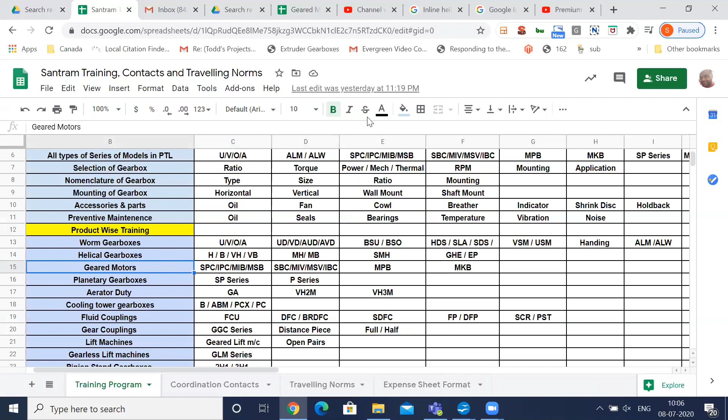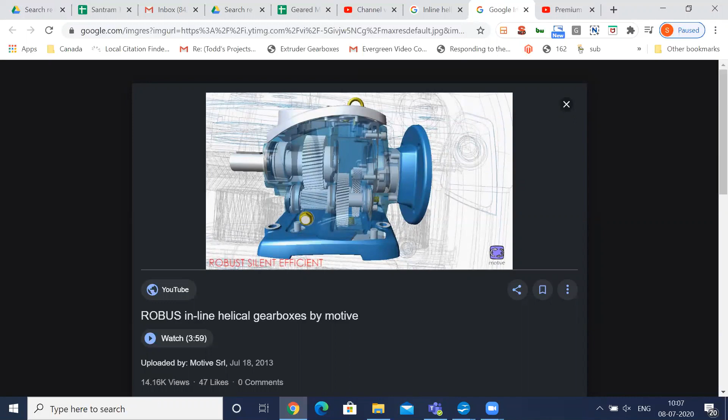Okay, so helical. This is an image view of a competitor's gearbox, but the technology is the same. I've just used the image. Here there is the pinion and this is the wheel. These pinion and wheel have teeth on them, cut at a helix angle, and they are the ones which transmit torque.

Like in a worm gearbox the main thing was the worm shaft and worm wheel, here in helical the main thing is the pinion and the wheel. Pinion and wheel combine, they match, and they make a single stage. In this case you can see 1, 2 and 3. There are three pinions, so three matching wheels: one pinion, one wheel, second pinion, second wheel, third pinion, third wheel.

And these are all bolts. This is the main output shaft. This output shaft will have this wheel on it. This is the end cover; it will have a small pinion on it at the input side. And this big cover will have the output shaft on it. There are three internal stages for a three-stage gearbox and two stages for a two-stage gearbox.

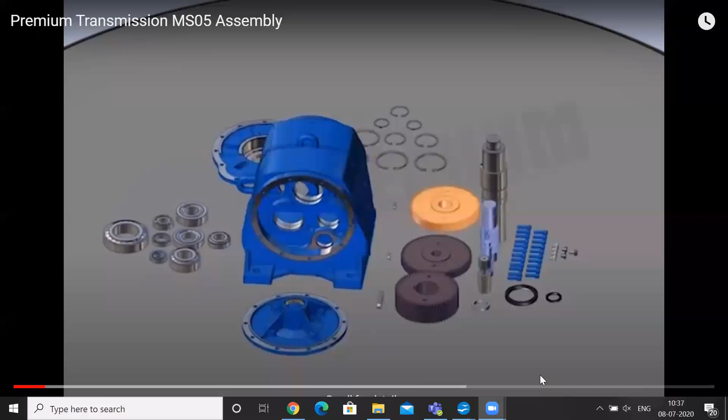So in geared motors, what are the main terminologies? Let's write it down. One is the stages. One stage is created by pinion and wheel, and that ratio will be up to approximately 5:1. So from 2:1 to 5:1 ratio is possible in one stage. The same concept applies if there are two stages, means 5 into 5, so around 25 ratio is possible for a two-stage gearbox.

So if it's a 10:1 ratio, it's a two-stage gearbox, but a combination like 2 into 5, or 3 into 3. And for three stages, the maximum possible ratio is 5 x 5 x 5, so around 125:1. If it is four stage, it can go even higher, a very high ratio. And here the 5:1 is approximate.

So if we consider 6, it might reach even higher, like 36 ratio, or in this case like 180. These are all combinations possible. Even 4-stage or 5-stage can be customized if they want, but the standard is 2-stage and 3-stage only. So that is the pinion and wheel arrangement.

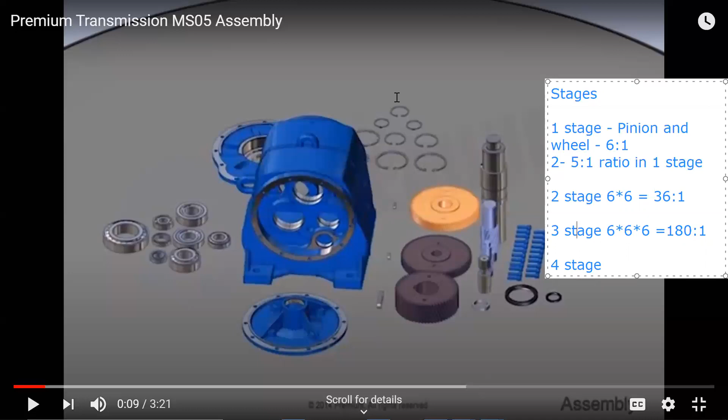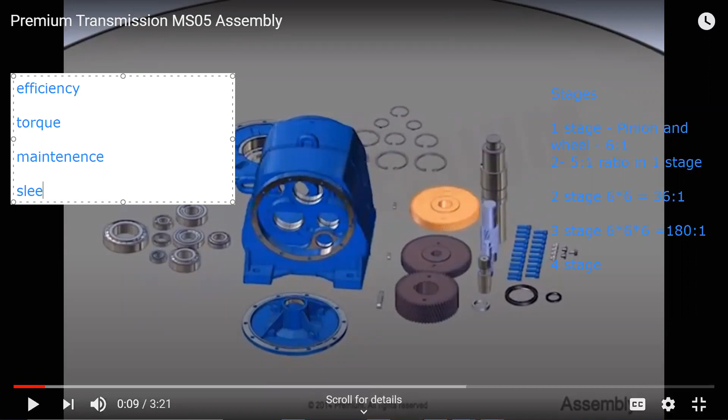Now, what are the benefits compared to a worm gearbox? Benefits are efficiency, torque, maintenance, sleek design, noise and life. Efficiency is almost 98% plus, while in worm it was 100 minus ratio divided by 2, so for 50 ratio it will be around 75%, while here it will be around 98%. So the efficiency is very high.

Torque transmission is definitely more, because it's a high efficiency product, so torque is transmitted fully. Maintenance is almost zero; once a year you just need to change the oil, the same 320 grade gear oil. Design is very sleek, meaning the weight to torque transmission is high.

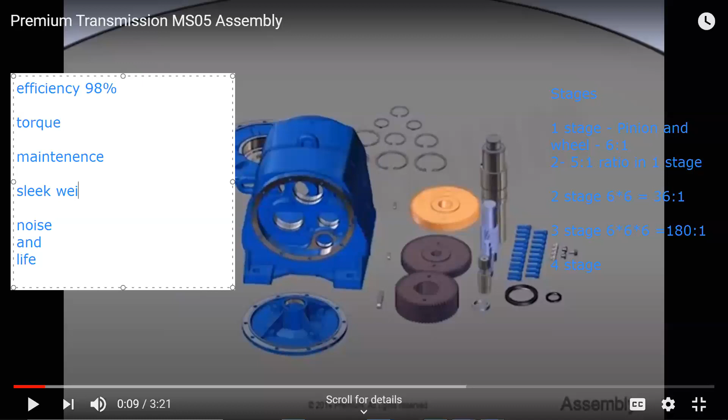It will be much higher than a 100 kilo worm gearbox. That is the weight to torque ratio. Then noise is much less, below 85 decibel. And life is very long. Apart from this, you can also discuss the ease.

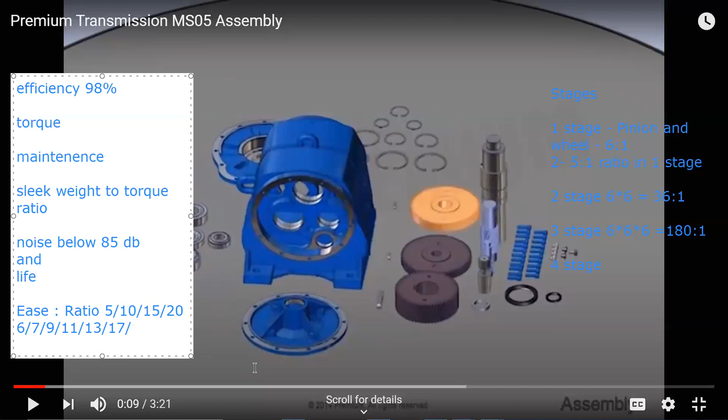That is the ratio. In worm the ratios are like 5, 10, 15, 20, but in helical it is like 6, 7, 9, 11, 13, 17. So the ratios are very flexible, and you can create a product with the precise ratio as per the requirement, not in worm. The input is direct mounted with the motor, which reduces the framework for mounting the motor. There are multiple benefits. It is mainly known as inline.

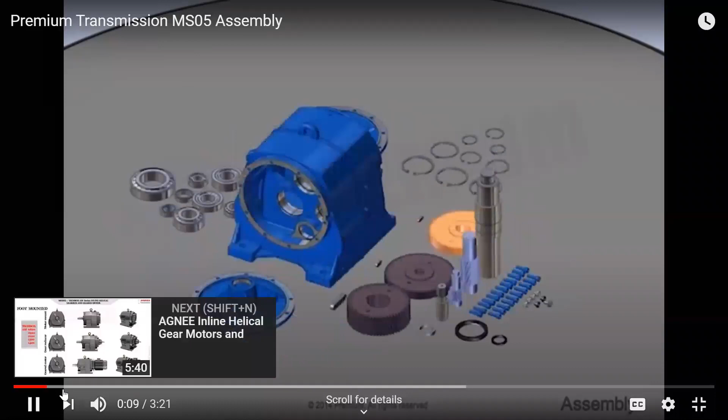That question I will answer by showing you an image. Let me just remove these things first. Now let's start the video to observe the assembly instruction of the MS05 type geared motor. So this output shaft and the input shaft are both in the same line. I'll show you one part, that's the assembled part.

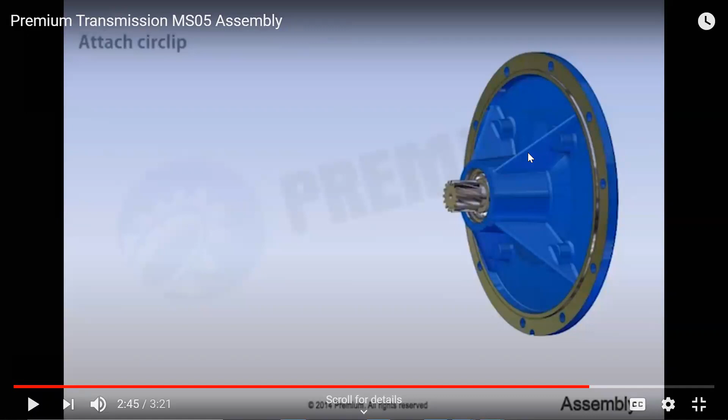Okay, see the adapter is having the pinion over here. So that is the pinion mounted in the input adapter. That is when it is in assembled state. Okay, this is the assembled part. This and this output are in the same line. So it is known as inline helical geared motor. Okay, so that is the key here.

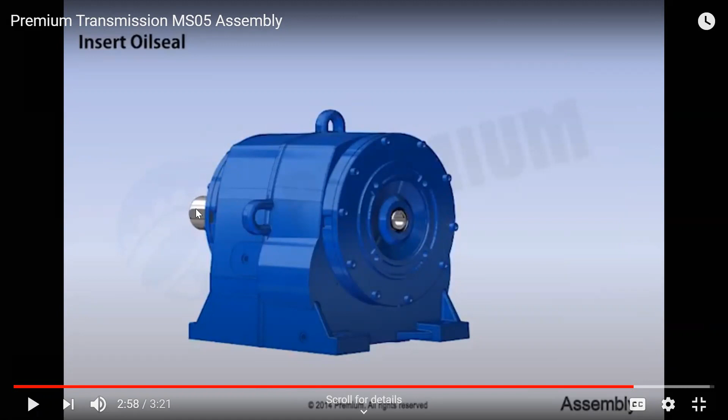So now let's exit the screen and let's get back to the basics. So the basics will start with the catalog. So this is the I and S series. This is like our bread and butter. Okay. This is the main series which we have that has the same part. Whenever you name it, it is type, size, ratio, frame or mounting, whatever you call it.

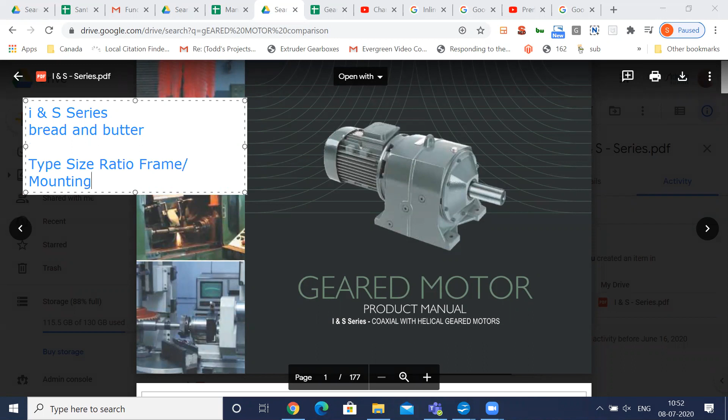So first thing is type. So it is IPC, SPC, IBC, SBC. Okay. So what is the difference between all four? And now how the sizes are named. Otherwise, frame, motors I have already taught you. And the other thing I have taught you are the ratios. Selection is same as it was in Altra. That is based on the motor power.

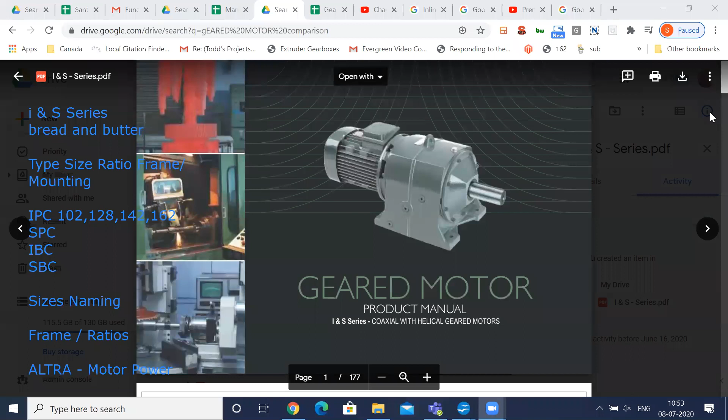Okay. So now IPC. What is IPC? IPC stands for total 4 models: 102, 128, 142, 162. These are all 4 models having oil filled already, and they are the smaller sizes. Okay, so these smaller sizes are ranging mainly till 3 HP, and let me show you one image. These are the mounting positions. That is not required right now. I'll show you another.

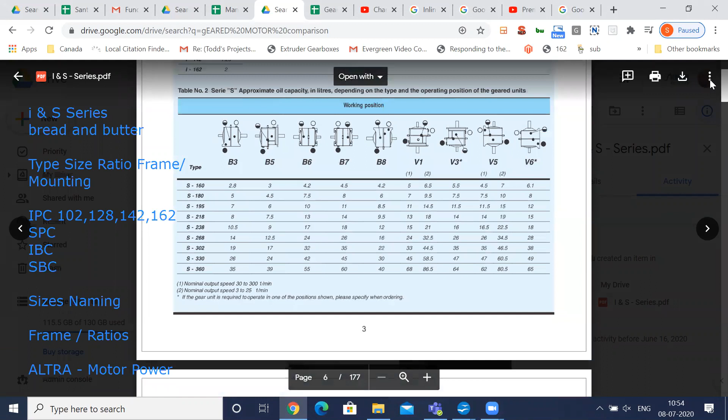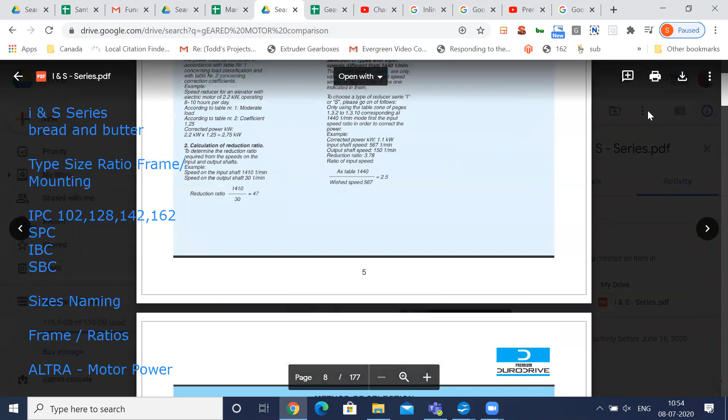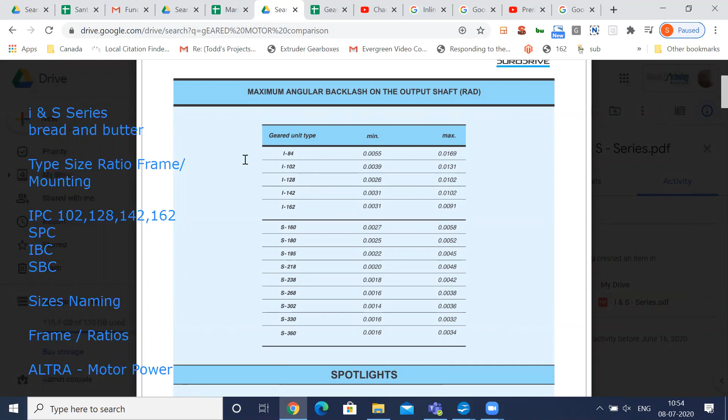Other thing is the bigger sizes. These are the S series. So that is SPC. SPC series, it starts differently. So let's talk about SPC. SPC is 160, 180, 195, 218, 238, 268, 302, 330, and 360. These many sizes.

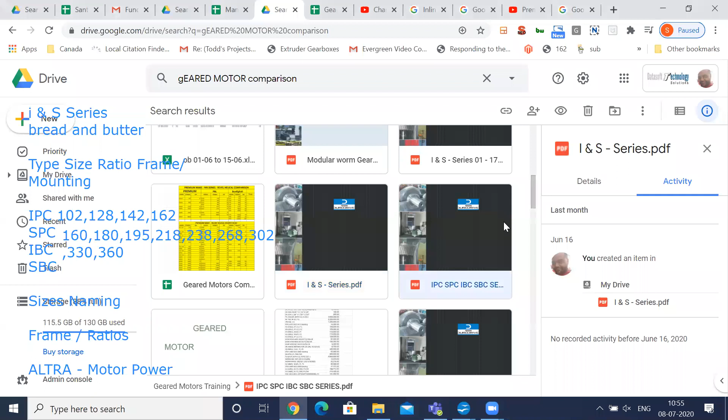So IPC stands for the foot mounted. Okay, the foot mounted unit is known as the IPC. So let me show you the image of that. Okay, so as I said, if it is foot mounted, it is IPC or SPC, and if it is flange mounted, it is IBC or SBC.

So here, for example, let me show you an image that will help you out. So these are all foot mounted. Okay, this is SISO, solid input, solid output. These are all HISO, that is hollow input, solid output. This one you can see it is an IBC. It is flange mounted on output, flange mounted on input. Okay. This one a bigger one. So these are like SBC. Okay. So let me just erase this part. I can move further.

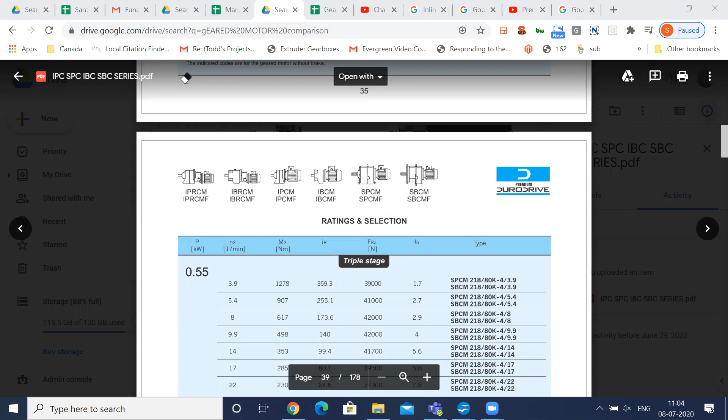Now the naming. Okay. So let me draw a part and you will know what's the naming. So from here till the ground level, that distance is actually the height. The center height of the output shaft is known as the name of the product. So in case it is IPC 128, see this one IPC, and 128 means the center height is 128 mm. So let me get through one drawing part.

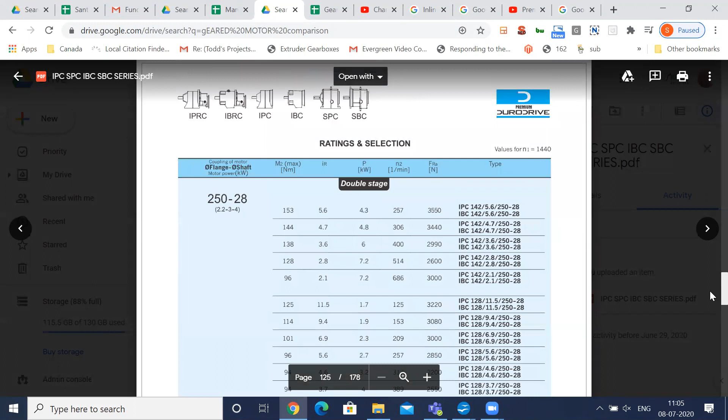So once you get through this I and S series, it is good enough that you have gone through MI or MS series. It's all one and the same. They are all inline helical. This I and S series is our Italian design from our Pujol background. Premium used to own the technology of Pujol, you know, Pujol Muntala. That was our Italian company, and that's the technology which is this one, I and S series.

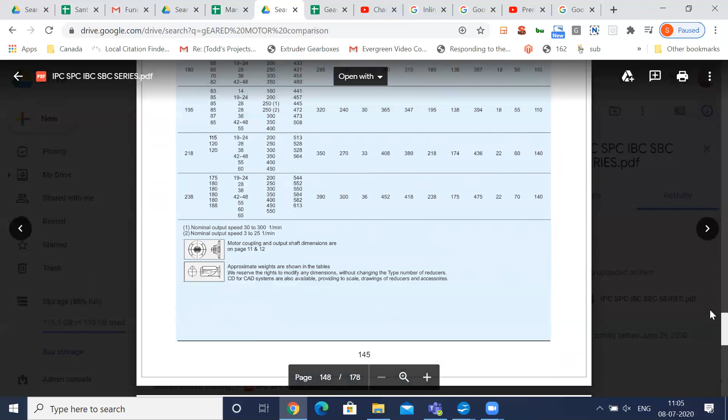So here, let me share a couple of drawings with you. You can see what's the center height. Okay, so here you can see H. So H is the center height. So here 160 model, the center height is 160. You can see here. So that is the key in the naming. So now you know what is the type. Now you know what is the size. You can search the ratios like you do in the Altra geared motors, like you can see here kilowatts and everything. Okay. Let me share that one.

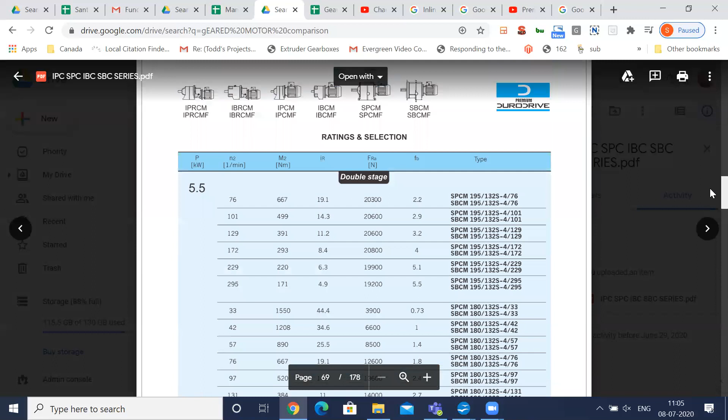Okay. Here there are two parts in the catalog. One is as per the kilowatt, and the lower half is as per the frame size. So we normally select as per the frame size. So like inquiry is of 10 HP. Frame size you can see from that comparison sheet which I have, that 10 HP is 300-38 and it is 132 frame. So you will go back. See, it is 350-42. So it is bigger. Go back. Yeah, so now it is 300-38 and it is mentioned 7.5 kilowatt, means it is 10 HP.

So here, now you know 10 HP, 30 RPM, you know this one torque, ratio, kilowatt capacity, RPM, and these are the models. So here we'll search RPM. Okay, so now 30 RPM here it is, but it is 5 kilowatt, so it is nowhere near 10 HP. So moderate load we consider 7.5 kilowatt means 10 HP. So moderate load will be around 1.5 times. So safety factor considering 1.5, it will be 1.5 into 7.5. It will be around 11.

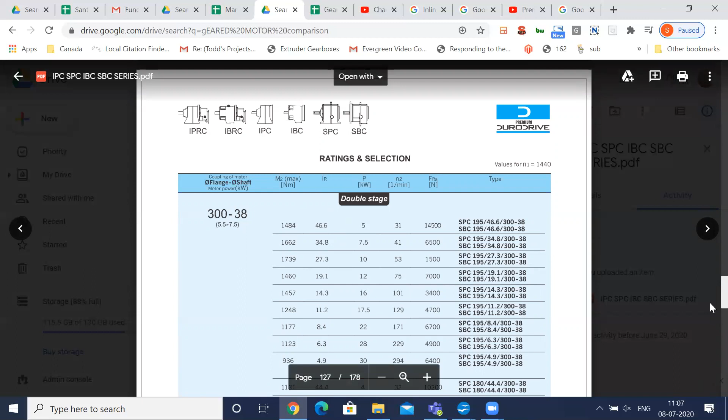So we'll go higher side, bigger model. So that is the 30 RPM.

That is with a safety factor of around 1.2, 8.7 divided by 7.5. Okay, so that is your selection. So this is the model, this is the type, size, ratio, frame. Okay, so this is the complete model. You will find this in our CRM. We use the Zoho CRM for the marketing purpose, making quotes and everything. So you will find these models all already installed there. Okay, that is the one part.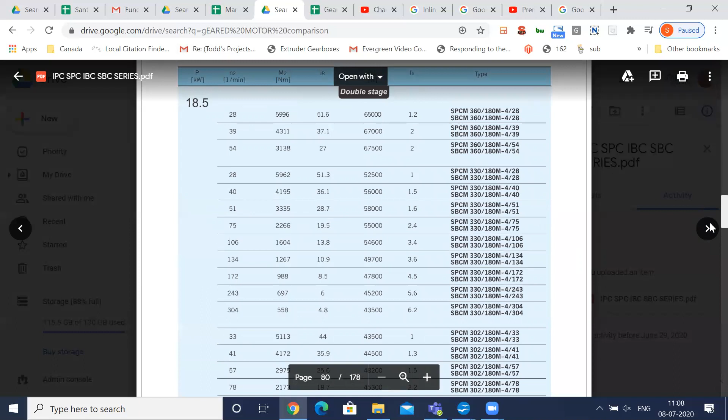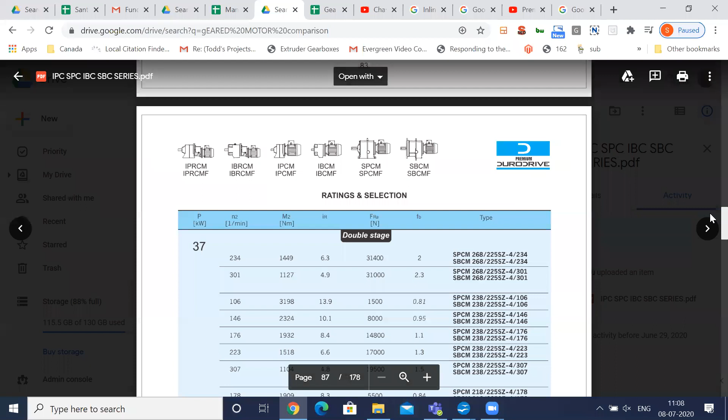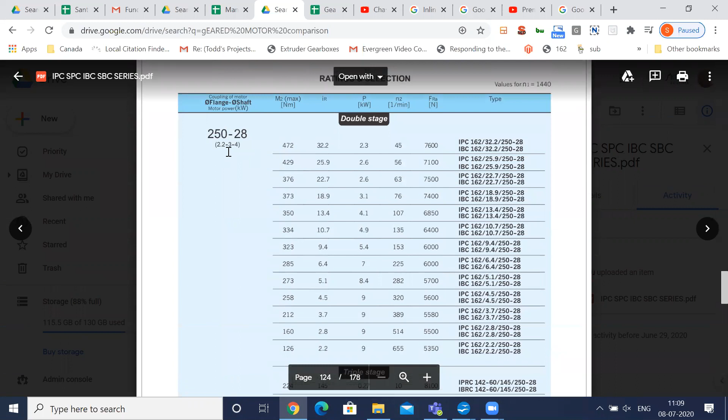So selection, let me do one smaller selection for you. Okay, like 5 HP, let us say 40 RPM. So 5 HP, 40 RPM. 5 HP is, let us see in this, 112 frame size, 250-28. So I go here, 250-28. Let's see, 250-28. Yeah, so now going back, yeah, there it is. 250-28. The RPM I said is 40, so anything near 40 in 3 HP,

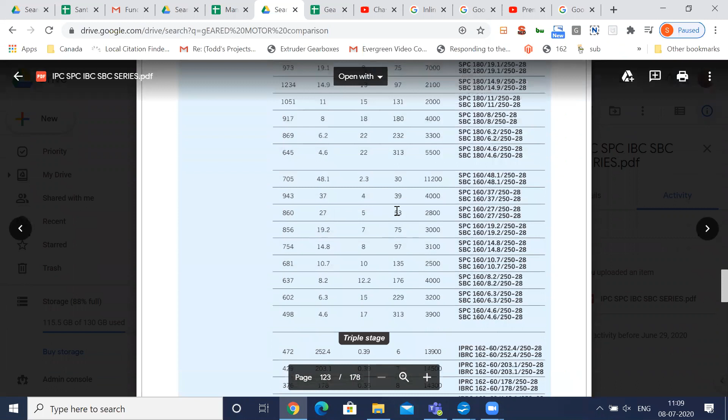5 HP, sorry. So 5 HP, yeah, 39 RPM at 4. That means safety factor is 4 divided by 3.7, so that is like 1.1. So this model is okay for a light duty application. Okay, SPC if it is foot mounted, SBC if it is flange mounted. Okay, so that's clear.

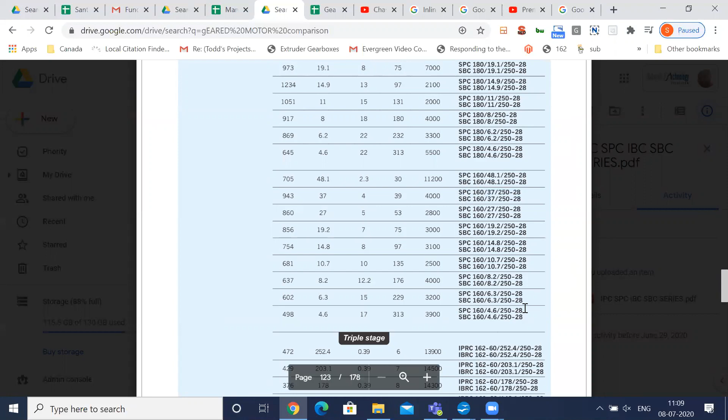RPM line. Okay, so here the RPM line is 40. Safety factor is 1.3. But it is 3 kilowatt. We need to say 4 kilowatt. This is 4 kilowatt and 39 RPM. There it is, 41 RPM for SPC 195, as you can see. Right?

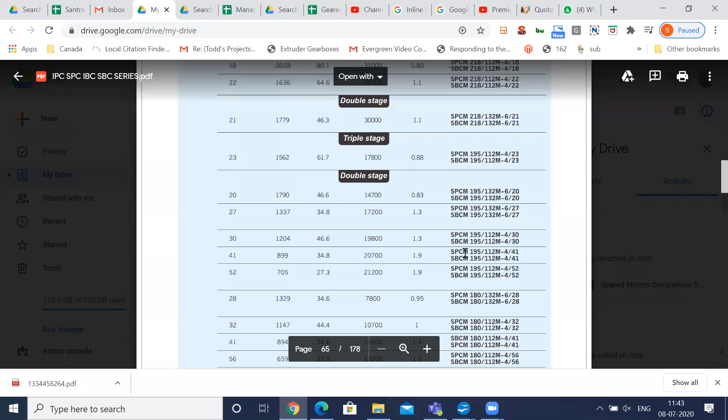Okay, so the model which we come across is 41 RPM, 34.8 is the ratio, 1.9 is the safety factor, SPCM 195, 112 frame, 4-pole motor, 41 RPM. So this can be written in this way if it is a geared motor, but in gearbox, in the CRM system also, we normally write only gear head. So it will be SPC 195, 34.8, and for 5 HP means 250-28. If it is 1.9 safety factor, it is heavy duty.

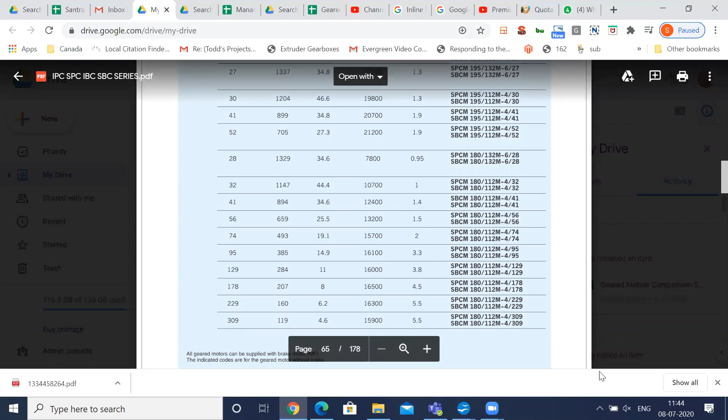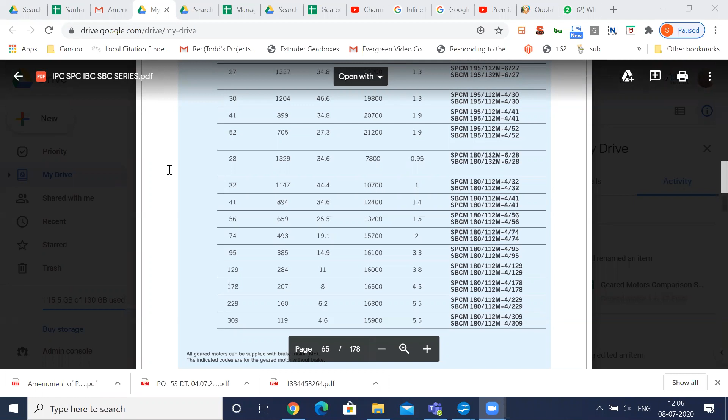So similarly, you can look at the MS series. MS series is our new Premium Stephan series. We have a factory in Germany. So that factory produces the MS series and it is replicated in our Aurangabad plant. The whole plant in Aurangabad, Shendra, is a state-of-the-art automated plant which makes IPC, MS, MP, MK, and basically all other geared motor series, and the fluid couplings. So here, let me just talk about what models come into picture.

MSB in this case is the foot mounted, and MSV is the flange mounted. Okay. So here the models are MSB 201 or 301, meaning 2 stage or 3 stage. One is the size, 01, 02. Just a moment, I'll get back to this. So this is 02, then adding 03, 04, 05, 06, 07, 08, 09.

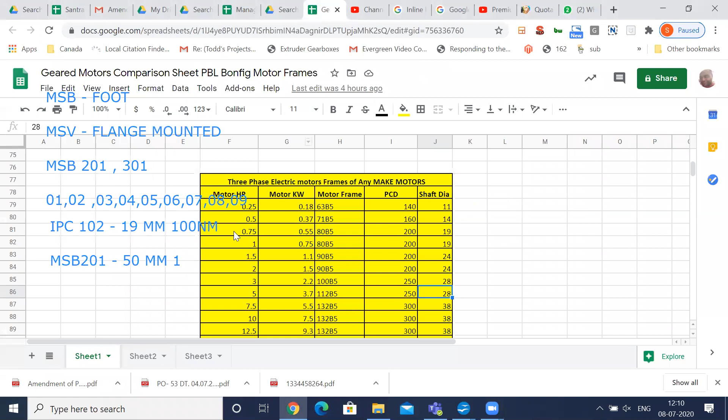But what is the difference between MS series and IPC series? See, in the IPC series, IPC 102 has a shaft diameter of 19 mm. While in this case, MSB 201, the first model, has a shaft diameter of 50 mm. This had a torque of around 100 Newton meter. This has a torque of around 1200 or something. Let me show you exactly what we stand at. Let's erase this for the time.

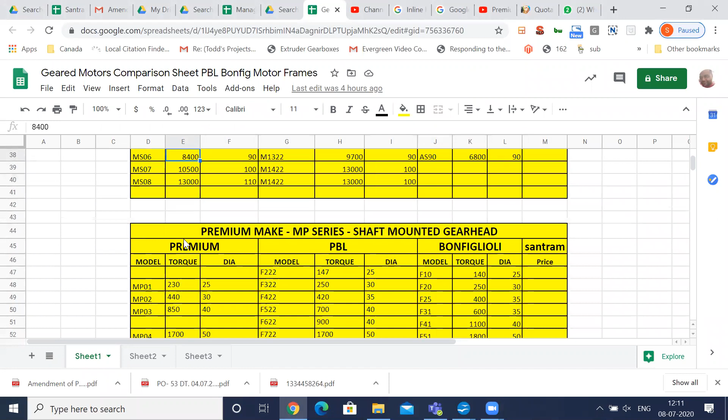Okay. Moving on, let us see. Yeah. So as you can see, IPC 102, the maximum rated torque is 125 Newton meter. This is the shaft diameter, while MS01 is 1450. Okay, so MSB or MSV01 is 1450.

So it is almost 15 times bigger. So in bigger sizes, it is feasible to provide MS series, while in smaller sizes, till like 10 HP, IPC series is more suitable. Okay. So that is how I have made this comparison chart, which you need to understand and remember and keep with you always.

The torque, dia, and the model wise, these cover the premium make. Similarly, I have covered two other brands here. This AM series and M series are for Powerbuild, that is Elecon, and AS series is for Bonfiglioli. Okay, so here we are covering major brands, that is PBL and Bonfi. Okay, so that is the IPC series and MS series.

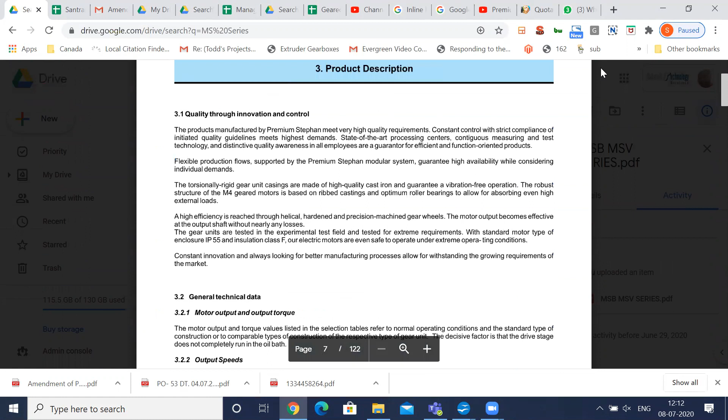So MS series is 0 to 9: 1, 2, 3, 4, 5, 6, 7, 8, 9. And its maximum torque is almost 18,000 Newton meter, which is one of the highest among all the competitors. Mostly competitors don't have above 12,000, 13,000, but we have till 18,000. This is a German series. It is very good quality, very compact, high torque. So there are many plus points of the MS series. Now let me show you one example.

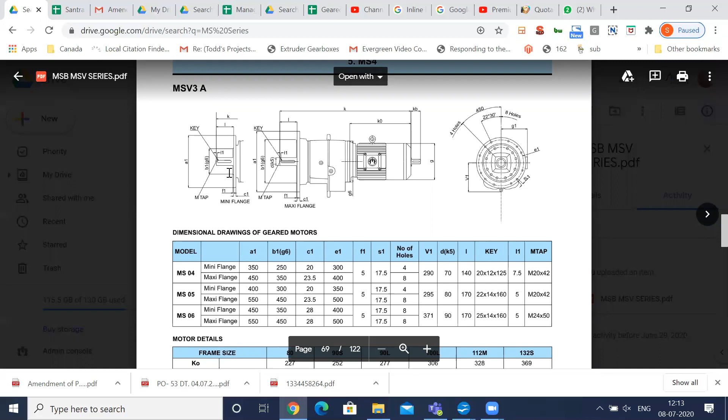See, so these are the flange mounted, vertical mounting. So here now we'll talk about these, the foot mounted with motor. See the center height, it is given as H, it is 268. So actually SPC 268 and MS05 are physically the same, but the torque carrying capacity of MS05 is almost double. So in bigger sizes we go for MS series, not SPC series.

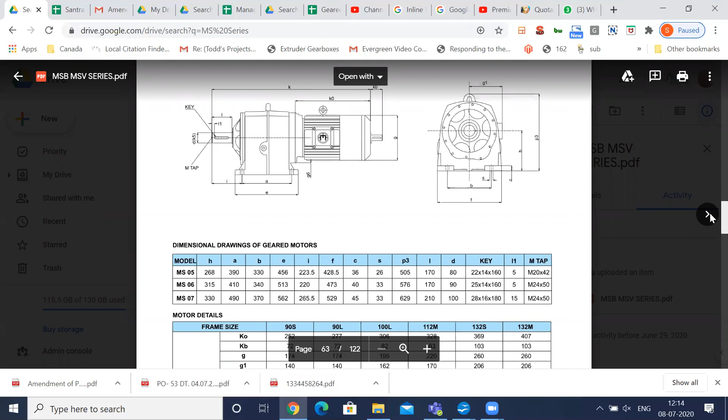SPC series, I think till SPC 195, that is 55 shaft diameter, is enough. So based on that I have created this comparative chart in which till 195 is mentioned, then I go on to MS. Okay, so these are the inline helical series and this is the way of selection. Now let me show you one selection. Let me take a bigger one, like 20 HP, 70 RPM.

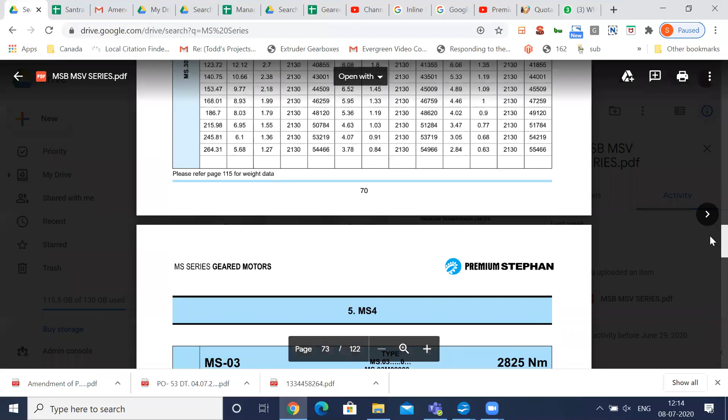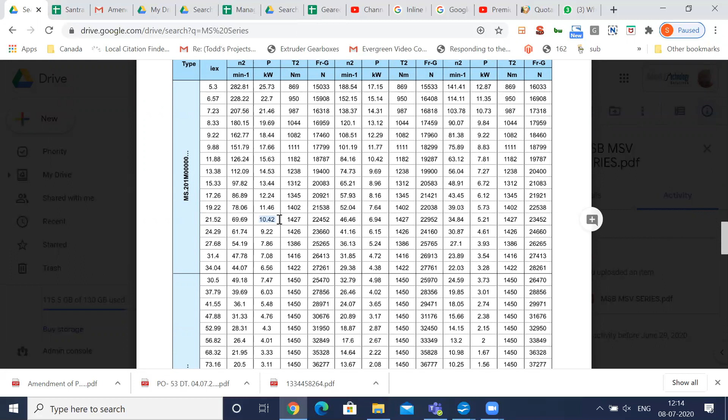There are two ways of selecting. Here, if you see below, I normally follow this one. From page number 69, there is a model wise torque and capacity rating chart, meaning what capacity each model has at various ratios. So here, for example, in MS01, at 70 RPM the capacity with a 4-pole motor is 11 kilowatt. We are talking 20 HP, that is into 0.75, so 15 kilowatt. So this is an undersized product. Let's move on to the next model.

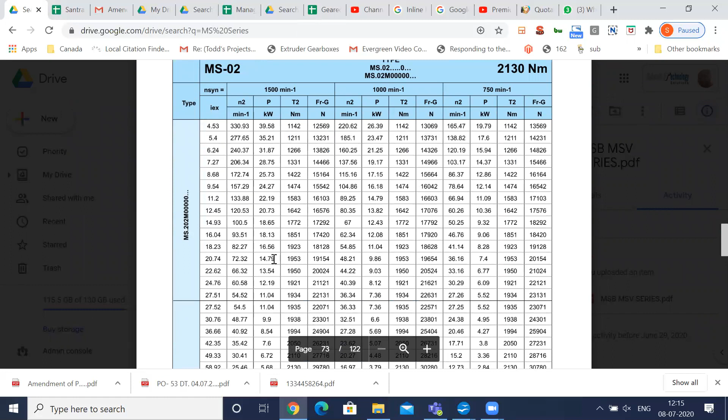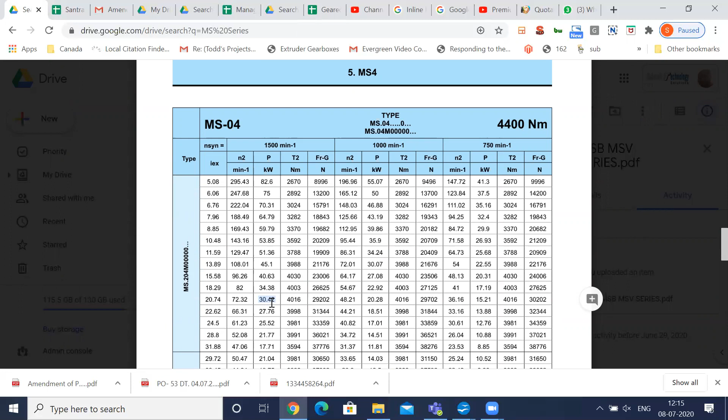02, it is 15, so it is light duty. And 03, it is 15, again light duty. 04, it is 30. So 30 divided by 15 is 2 safety factor. So the capacity is almost double, and this gearbox is perfectly suitable for heavy application. So for a flange mounted vertical application, the model will be MSV 204, two stage.

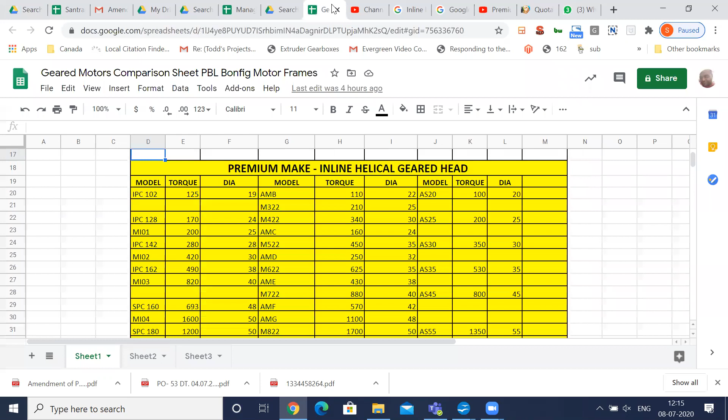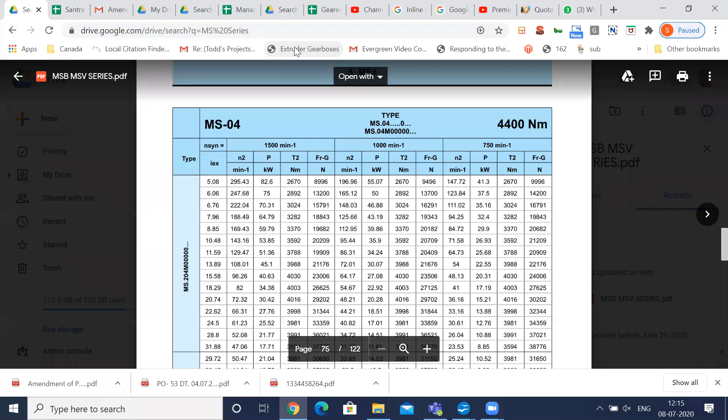20.74, and if it is 20 HP, you have to go in the gear motor section and understand the frame size of a 20 HP motor. For 20 HP, it is mentioned 160 frame or 350-42. So what will be your actual model here? It will be MSV for vertical, 204, 20.74 and 350-42 frame size. Safety factor is 2 and the mechanical capacity is 30. Motor power is 15 kilowatt. So the safety factor is 2, and this is vertical.

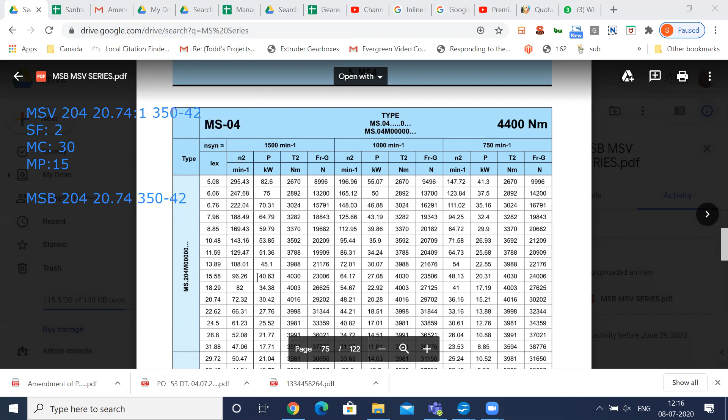If it is horizontal, then it will be MSB 204, 20.74 and 350-42. Now let us take another, bigger example, like 50 HP, 100 RPM. So for 100 RPM, 50 HP, that is 37 kilowatt, it is almost what you need; the safety factor is 1 in this case. So we'll go to an even bigger model. MS05 model here is 50 kilowatt. So still one higher model for heavy duty.

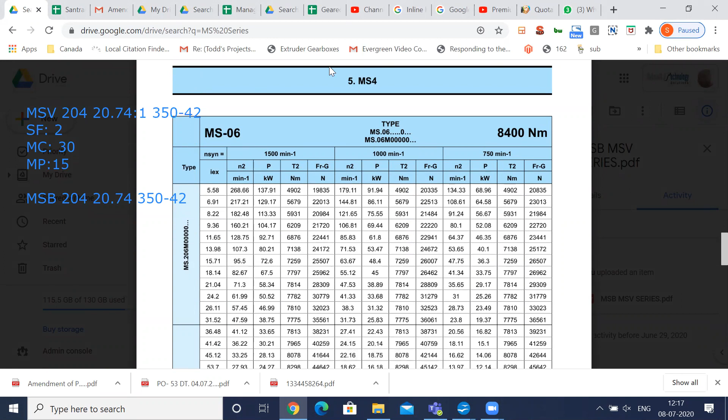So here at 100 RPM it is 72 kilowatt. Just a moment. Okay, so in this model for 100 RPM, as you can see, it is 72 kilowatt. Let me note that down. MSB, suppose it's a foot mounted inquiry, 206, and ratio is 15.71, and frame. Now frame is the key here.

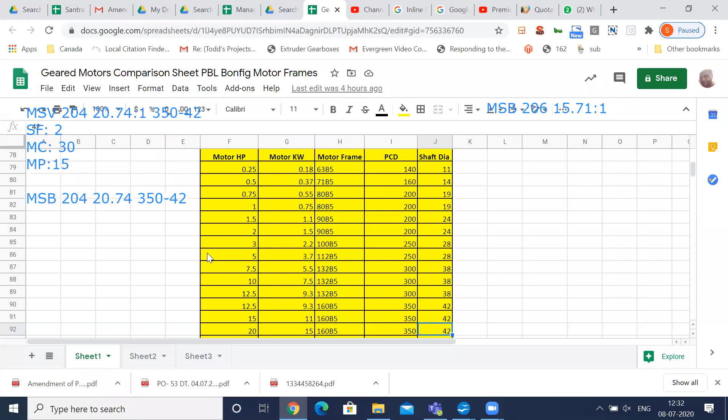For the frame, you have to see here, where is it? Frame for 50 HP. So it is 450-60, 225 frame. So we'll go back here to the text. It's 450-60. Okay, so now the next thing is safety factor.

It is 72.6 kilowatt divided by 37 kilowatt. So if you have a calculator, you can calculate, but you can definitely see it is approximately 2. To be precise, it is 72 divided by 37, so it is 1.96.

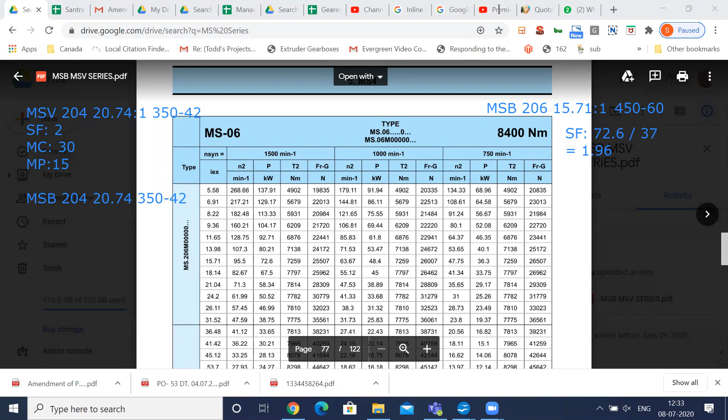So that is it. This is the geared motor series, MS series and MSV series. This much is enough. For any other applications and developments, we'll let you know. We also have some videos on YouTube where you can see them in premium transmission. So that is all for the inline series. Okay.